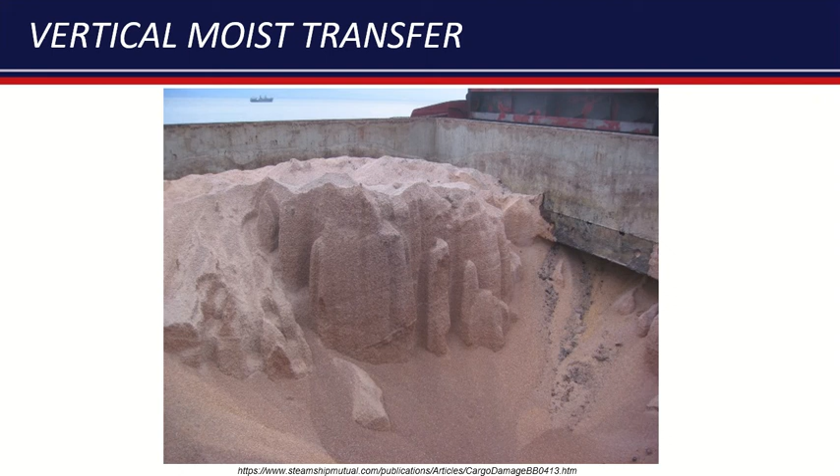We continue with bulk. Some other risks when you ship bulk cargo. One of them is vertical moisture transfer. Maybe you can imagine that the cargo you see now, it's cement and it became wet. Cement in that case actually changed from its chemical form. Water was added to it. And the ship is obliged to bring the cargo in the same state as it was loaded in the loading port. It needs to be in the same state in the discharge port. So in this case, something changed the cargo in a bad way.

You see the same over here, vertical moisture transfer, and especially it's between the joint of two hatch covers. Most likely water has been dripping down to this column over here, and it changed the cargo.

It's something to bear in mind, and it proves that you need to be spot on with your maintenance on your hatch covers and the hatch cover rubbers to prevent moisture building up in your hold by green water, and this water can change the composition of your cargo, and you are obliged to bring the cargo in such state in the discharge port as it was loaded in the loading port.

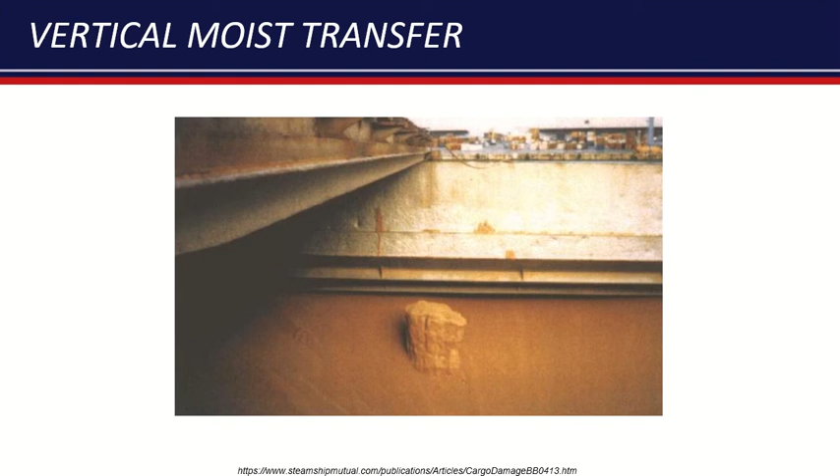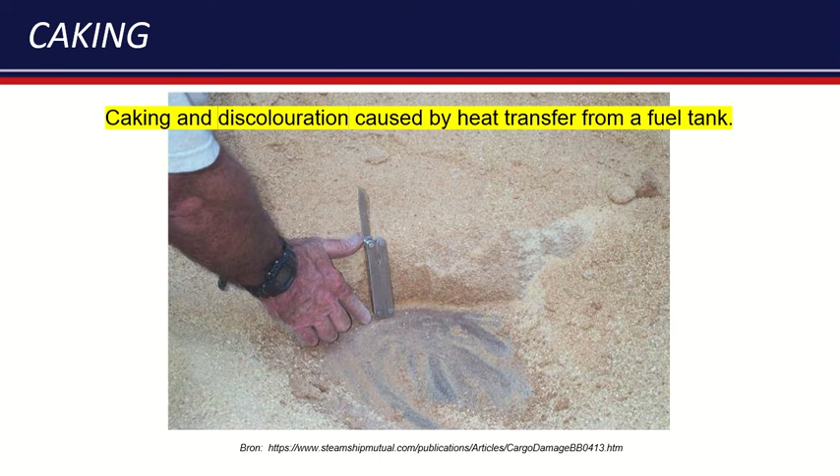So in this case of caking, if there's a risk of caking, you need to speak with your chief engineer about heating the fuel tanks.

So we're briefly going to speak about ores. In Dutch we say ertsen. Ores have a relatively small stowage factor, and it means basically the specific weight of ores is quite high. It's quite a dense cargo. Here you see a chute, conveyor belt, pouring the ores in the hold.

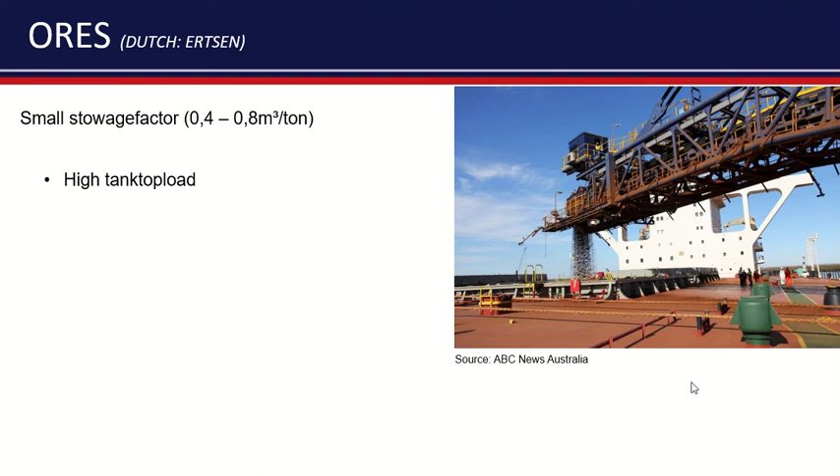Due to the fact that this kind of cargo has a high specific weight, it means there's a lot of stress and impact, also pouring impact on the tank top. Something to bear in mind if you make your loading plan and if you are busy with becoming seaworthy. Think about your bending moment and your shear forces, especially on this kind of ships. Tension on the hull and the hatch coaming, the same reasons actually as on the tank top.

You meticulously need to calculate your loading and discharge, your deballasting plan. All the steps need to be calculated in the stability program step by step, and it's very important not to exceed the maximums of the bending moment and shear forces. Don't exceed the limits.

Well, because there's a lot of cargo close to the tank top, we will not get so high with these ores. So the center of gravity of the parcel of ore will be very low. It means the ship will be very stiff. So the rolling period will be very short. This is bad for the crew, but it's also bad for the ship itself. The steelwork, welding connections, it's not very good sometimes, and it's a point of attention. Stiff ship.

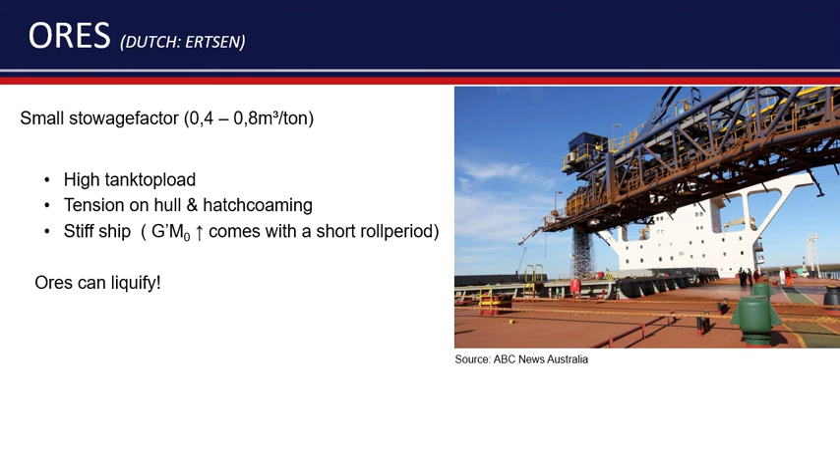And ores can liquefy. So if there's too much water inside of the ores during the sea voyage, we start pitching and rolling. There's a vibration in the cargo from the engine. Water can come up, it can surface, and that can impose a risk to the stability of the ship. Liquefaction. It looks like this. I think we saw it earlier also.

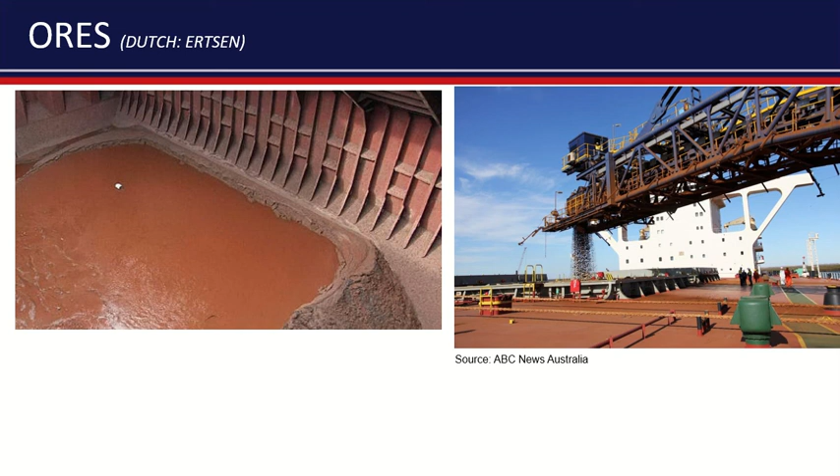So here you see a lot of moisture among the ores, and all this water can rapidly take the transverse center of gravity out of the center line and create a big list on the vessel, and that's risky.

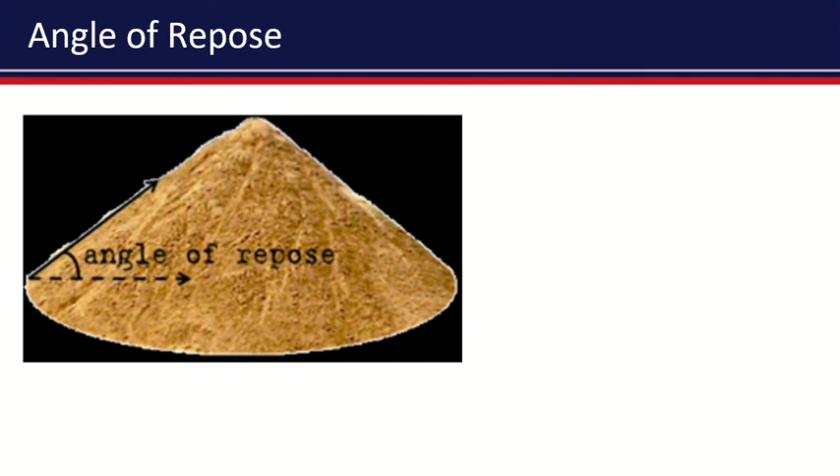Another thing to remember is the angle of repose. If we pour a bulk cargo, due to the friction of the molecules, we get a certain cone. And if we look at the angle with the horizon, the cone has a certain angle of repose, and that has something to do with the friction among the molecules of the bulk cargo. The definition is over here, the angle with the horizon if the cargo is freely poured.

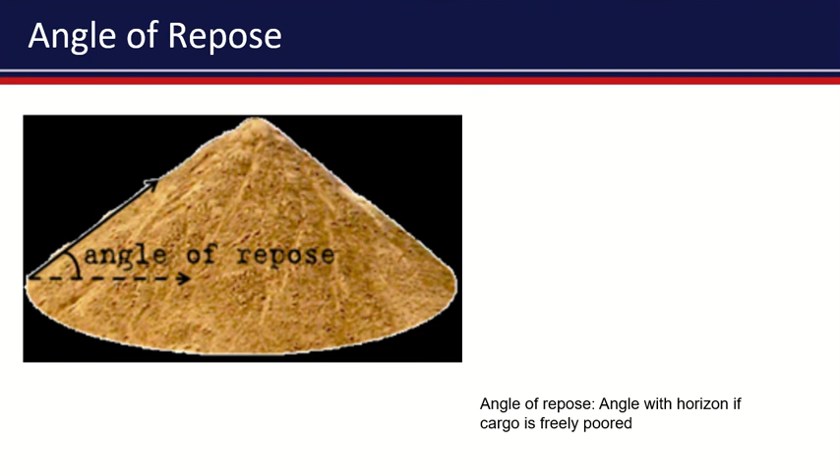I hope you can imagine that if we make a sea voyage with all these cones in the cargo holds, it imposes a risk of collapse of these cones. If the cones collapse, also the transverse center of gravity of the ship drastically changes, and probably in a bad manner. So this transverse center of gravity will get out of the center line, and then the ship gets a list, and that can be highly dangerous.

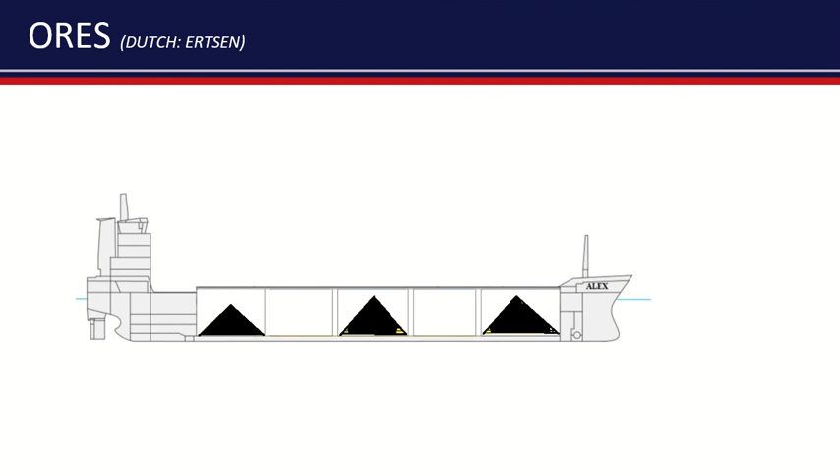So ores, now we know about angle of repose and pouring cones. If we know that up front, the lawmaker says this is not allowed. You are not allowed to sail with these kind of cones in your cargo hold. There's an obligation to trim the vessel. This is not allowed, but you should make it horizontally flush. I will show you a movie in a second.

And if this is compulsory, yes or no, you can find it in the IMSBC Code, and it depends on the steepness of this angle of repose. We're going to speak later about it in the ordinary lesson. That's it for now.